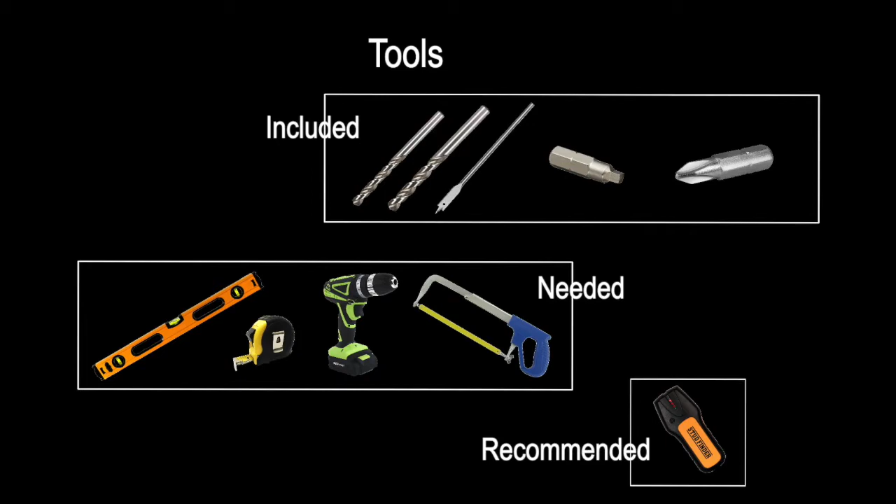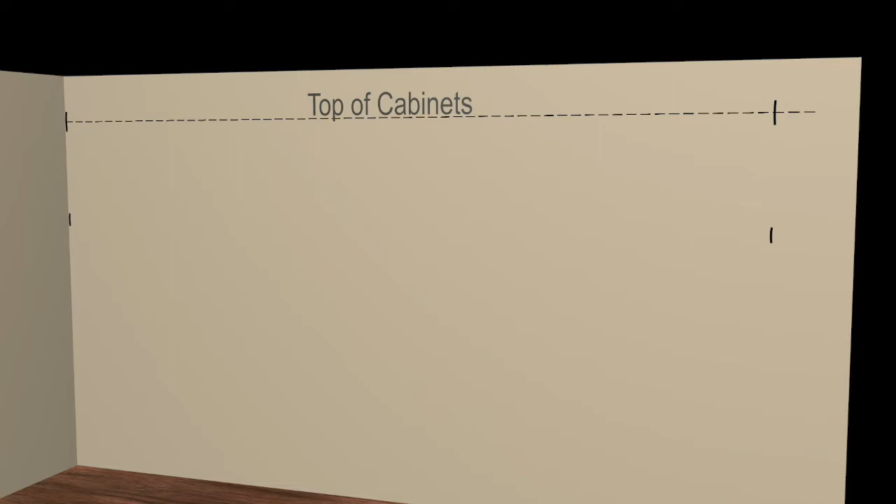On the walls where the cabinets are to be installed, mark the cabinet layout endpoints with short vertical lines at eye level. Using a level, extend each layout endpoint line up the wall and mark a short vertical line that extends both a couple of inches above and below the height where you want the top of your cabinets to be located.

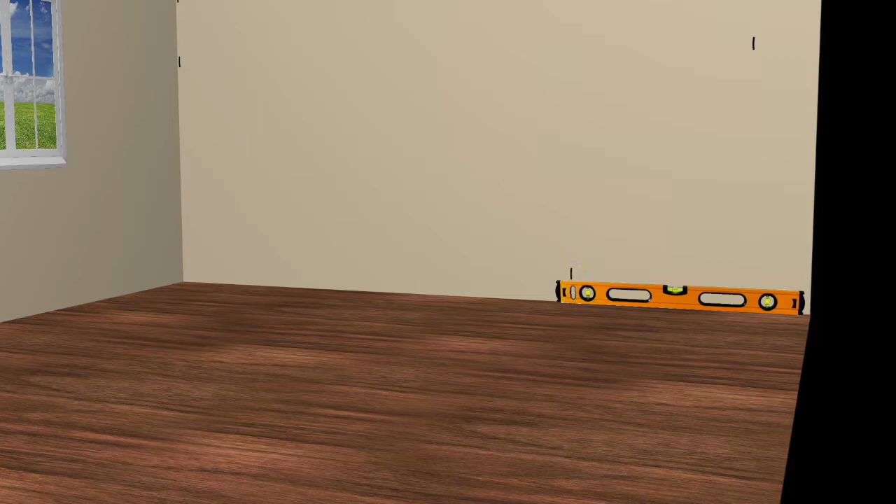Within the cabinet layout space, find the high spot in the floor along the wall and mark the wall at this location. Then check the floor along a line located 2 feet out from the wall. If the high spot location changes, then use your level to transfer the new high spot over to the wall and mark the wall at the new location.

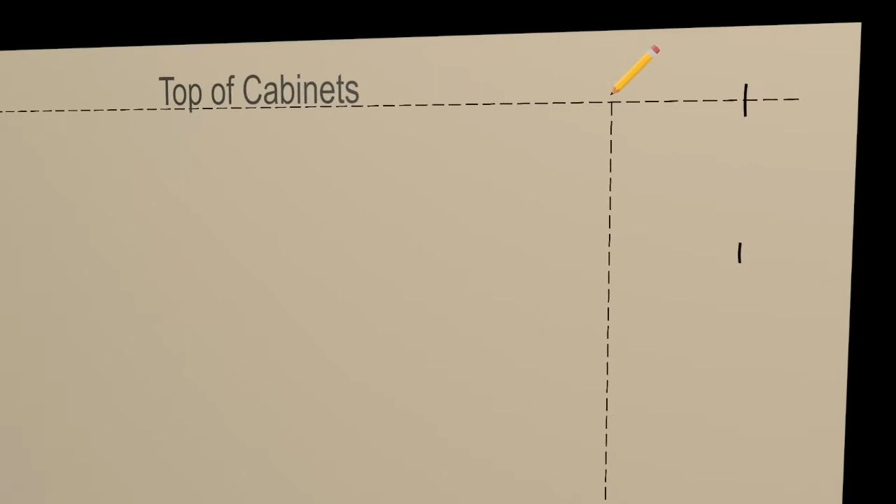At the marked high spot just located, measure up the wall and make a short horizontal mark 13/16 of an inch above the height where you want the top of your cabinets to be located. This horizontal line marks the Eazy Hang wall rail mounting hole height.

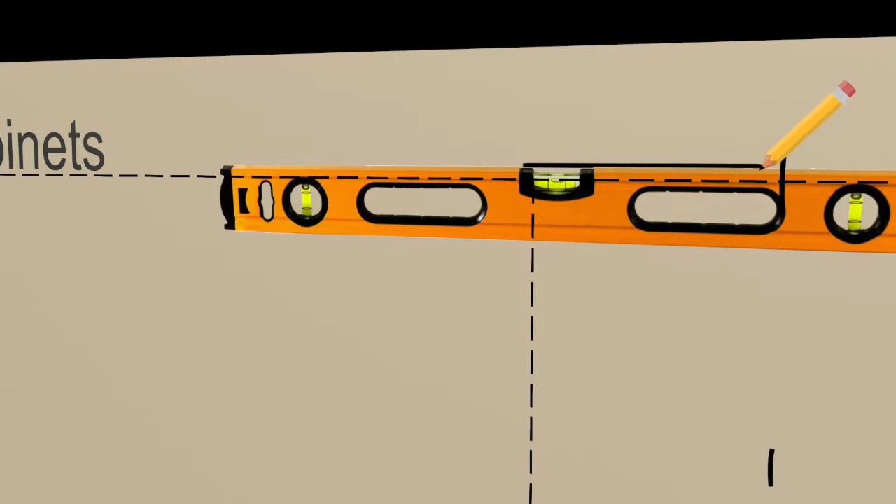Using your level, extend this line over to where it intersects the closest one of the 2 cabinet layout endpoints. Along the horizontal line just made, locate the wall stud closest to the same cabinet layout endpoint and mark this stud center line.

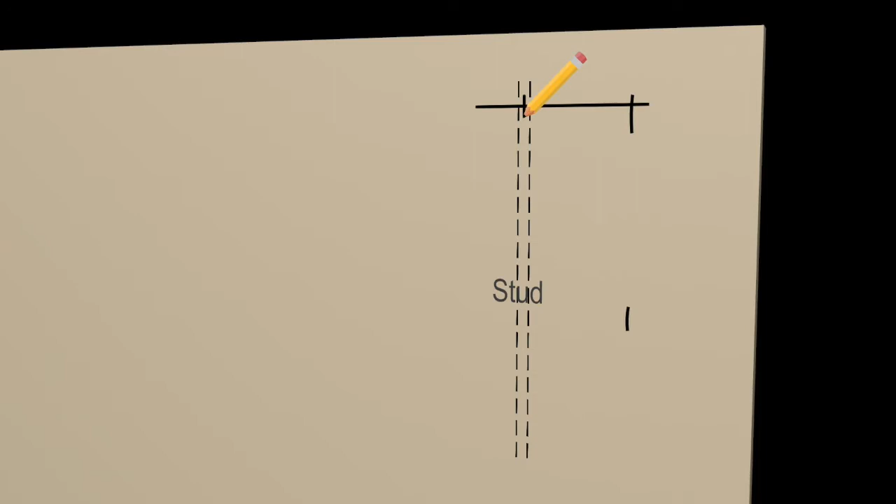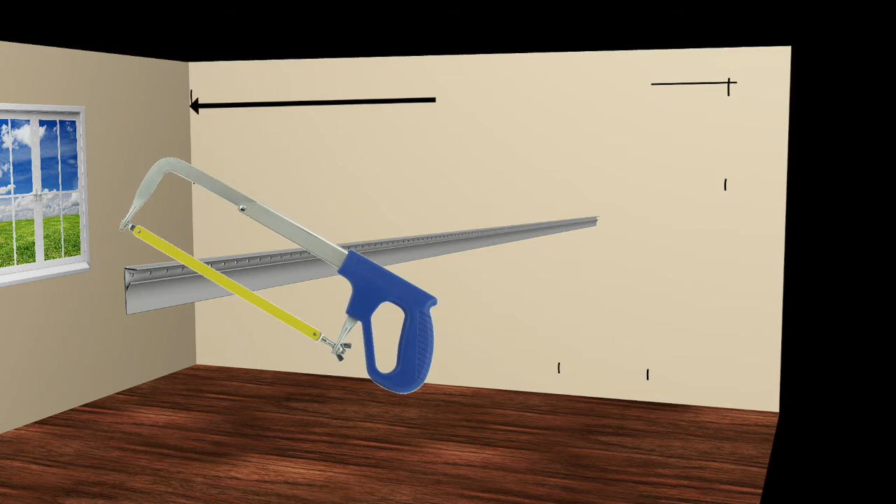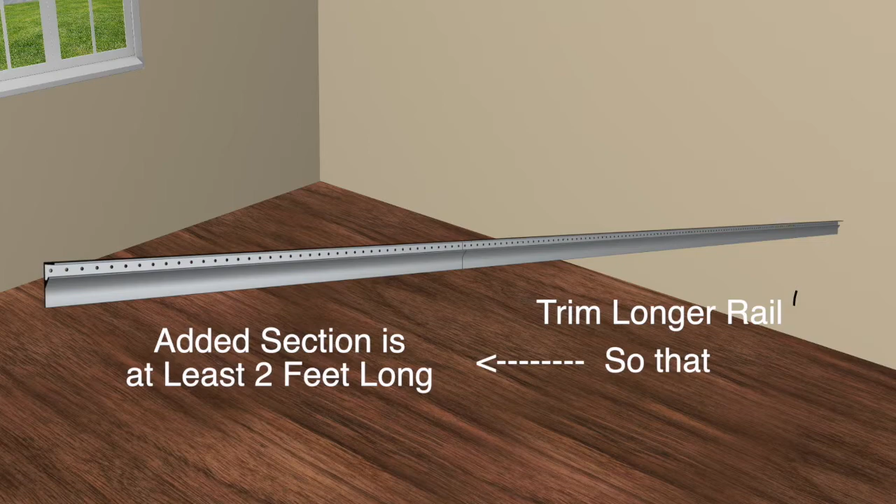Measure and cut the Eazy Hang wall rail 2 inches shorter than the cabinet layout length. If you need to install an additional extension of rail that is less than 2 feet long to make up the total length of rail needed, it is recommended to trim the longer rail so that the added section is at least 2 feet long.

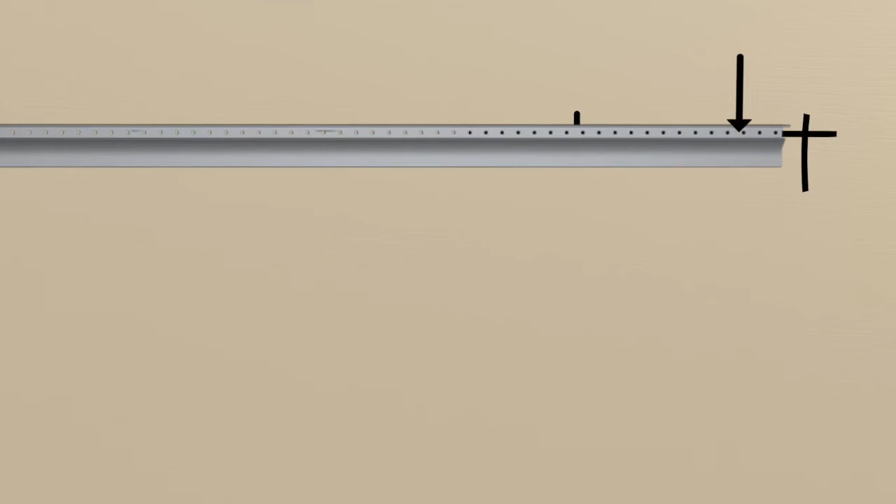Set the Eazy Hang rail on the wall within the cabinet layout space so that the rail mounting holes are centered over the mounting hole line. It would be helpful to install a nail or screw near the center of the layout space to serve as a temporary rail support.

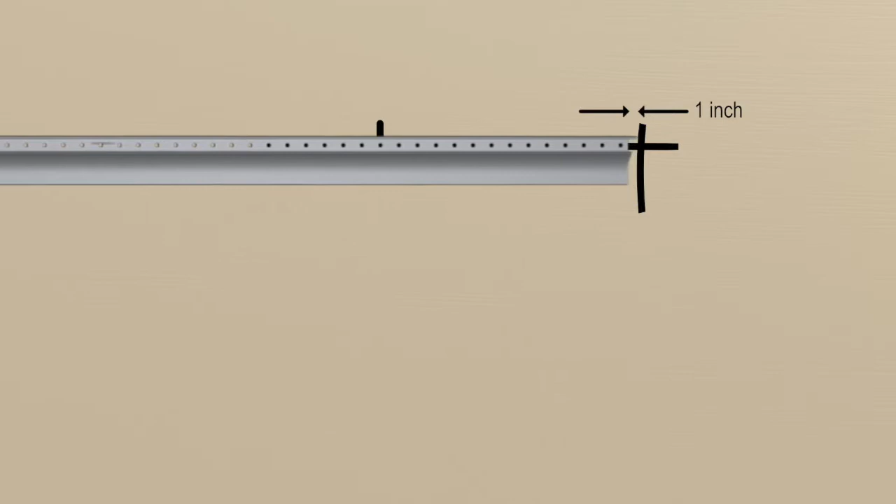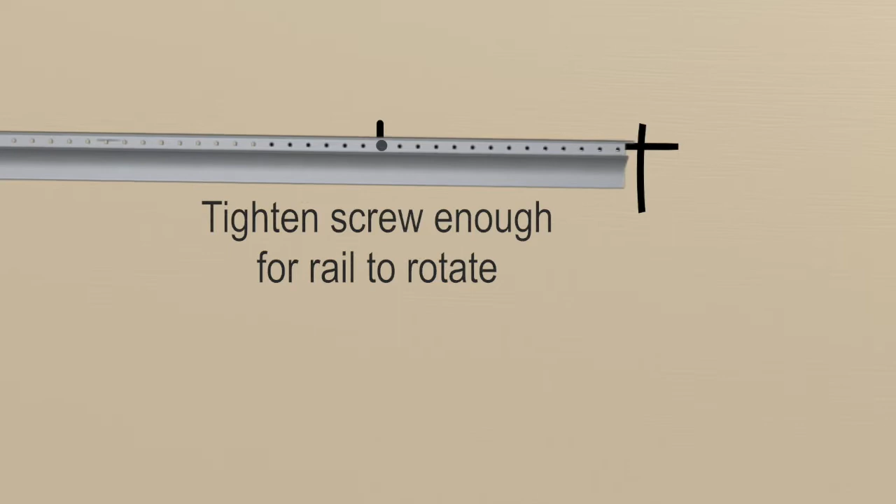Adjust the rail so that the end that you are holding is located about 1 inch from the layout endpoint. Then install a black oxide 10 by 2 inch washer head screw through the wall rail hole into the wall stud whose center line was just located. Tighten the screw so that the rail is snug but is able to pivot freely. Remove the nail or screw installed as a temporary support from the center of the layout space.

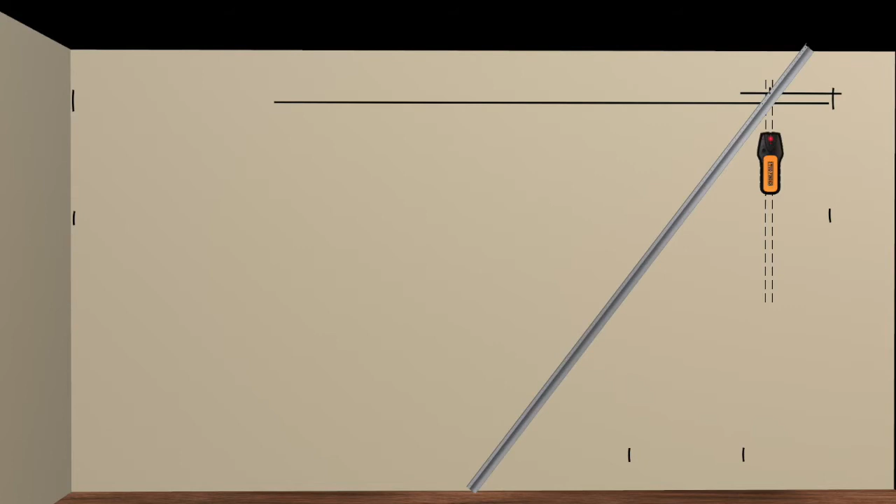Place a level along the top of the wall rail and adjust the rail until it is level. Draw a line along the bottom edge of the rail and then let the wall rail pivot downward to a resting point while locating the centers of the rest of the wall studs along this line.

With the stud centers located, realign the wall rail bottom edge to the level horizontal line just made and install another black oxide 10 by 2 inch washer head screw in a stud near the center of the rail and another screw in a stud near the end not yet attached, again making the screws snug but not tight.

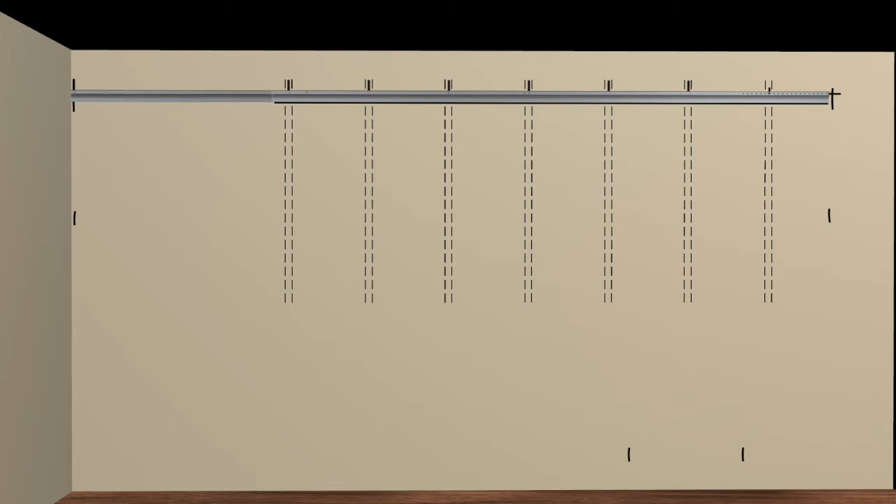If the layout includes an extension, butt the additional rail against the end of the rail already installed. Holding a level along the top of the installed rail and the additional rail, draw a line along the bottom of the extension and find the location of the studs along this line as you did for the main rail.

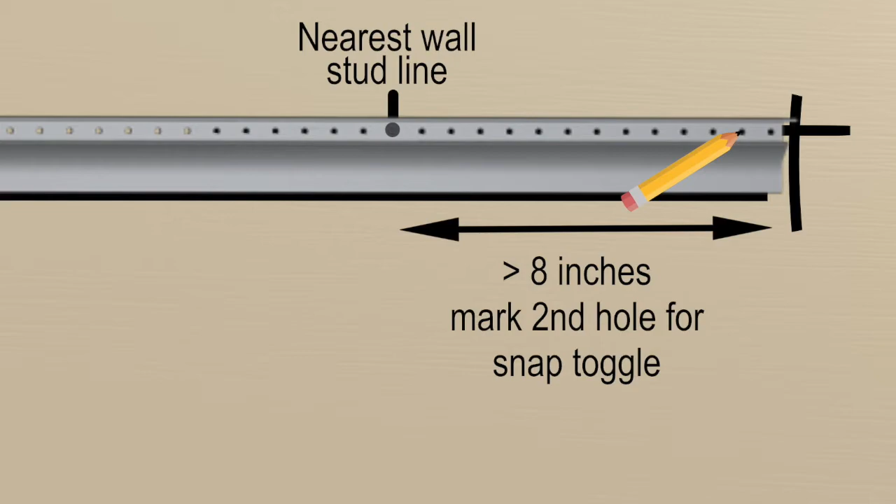Before installing the rest of the 10 by 2 inch washer head screws, check the distance from the wall rail ends to the closest wall stud at each end. If the end of the wall rail extends more than 8 inches beyond the closest wall stud line, then mark the wall by tracing around the inside of the second to last hole of the wall rail at the affected end of each wall rail section.

Remove all of the rail fasteners except for the first one, and again let the wall rail pivot to a resting point while you install a snap toggle at the marked locations. Snap toggle installation instructions are provided separately.

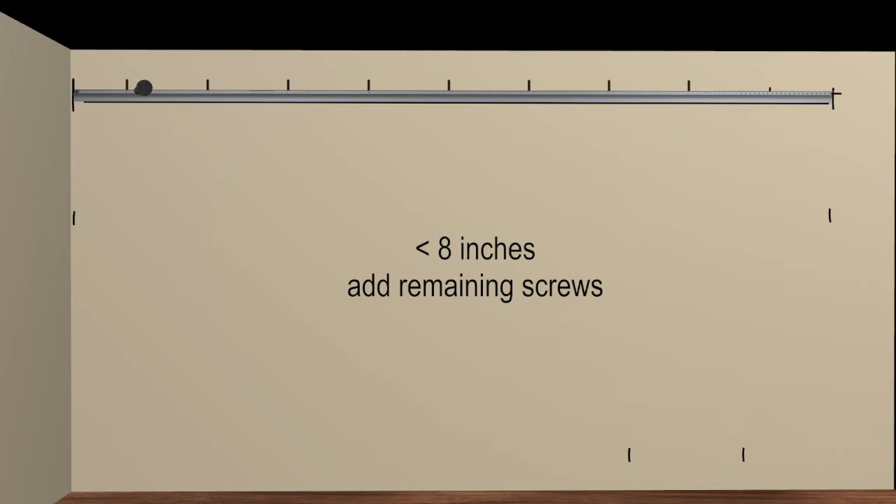If the end of a wall rail extends 8 inches or less beyond the closest wall stud, then finish attaching the wall rail and extension using the black oxide 10 by 2 inch washer head screws at each stud location, making the screws only snug for now.

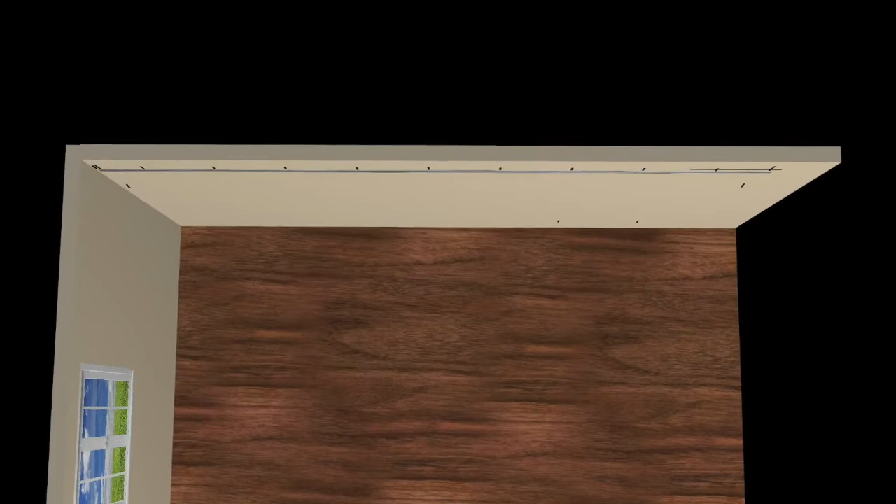Before fully tightening the wall rail at each stud location, the Eazy Hang wall rail needs to be checked for straightness along its length. A great advantage of using the Eazy Hang system is its ability to compensate for waviness in a wall by providing a straight and level hanging surface. This is especially critical when hanging frameless cabinets. Taking extra care in this step will further simplify the alignment of any type of cabinet.

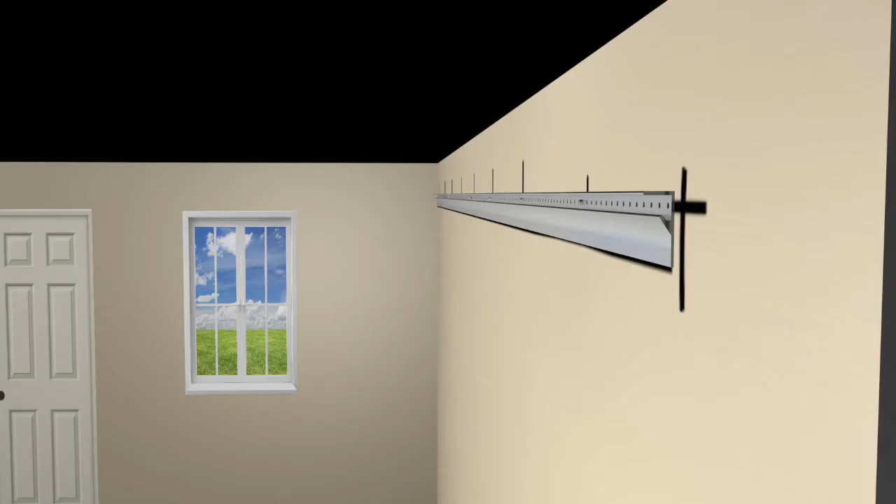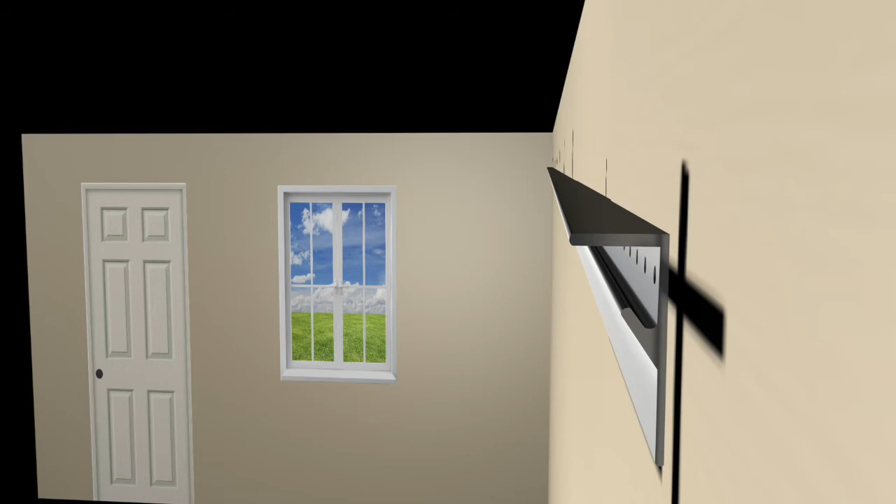Adjusting for low spots in the wall surface. Sight along the top of the wall rail from end to end, noting where there are low spots in the attachment points along the rail. Loosen the rail attachment screws in these low areas and insert the provided plastic horseshoe-style shims between the rail and the wall at the stud locations as needed to align the top of the rail in a straight manner. After shims have been added, the rail mounting screws should be tightened securely. Recheck the wall rail for straightness and levelness.

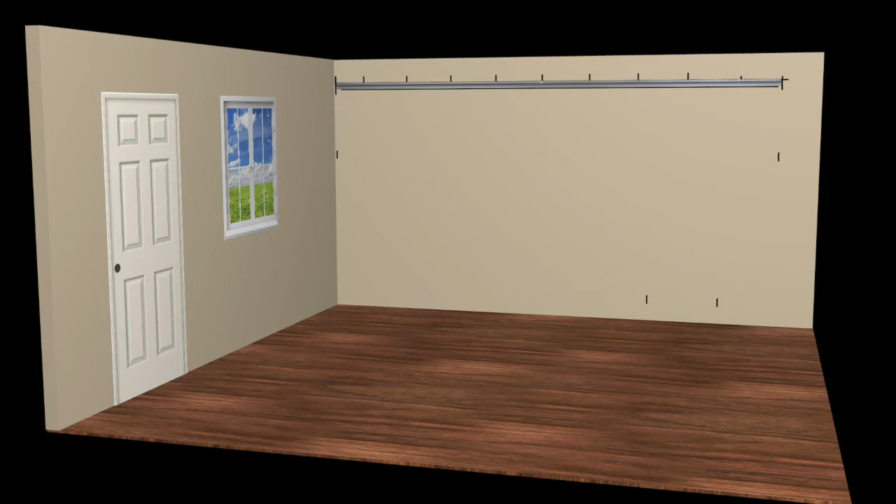Adjusting for high spots in the wall. This is not done now, but rather is accomplished when mounting the cabinet brackets. You simply note where on the wall that the high spot is located in the cabinet arrangement, identify the affected cabinet, and then adjust the location of the affected bracket as needed away from the high spot.

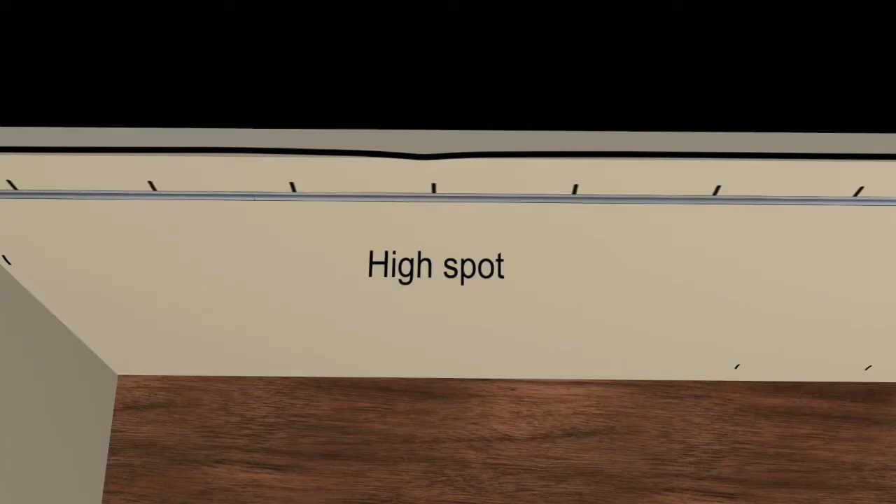If there is an extreme high spot, it may be necessary to modify the wall at the high spot or separate the wall rail into two sections that stop short of the high spot to enable the wall rail to run straight.

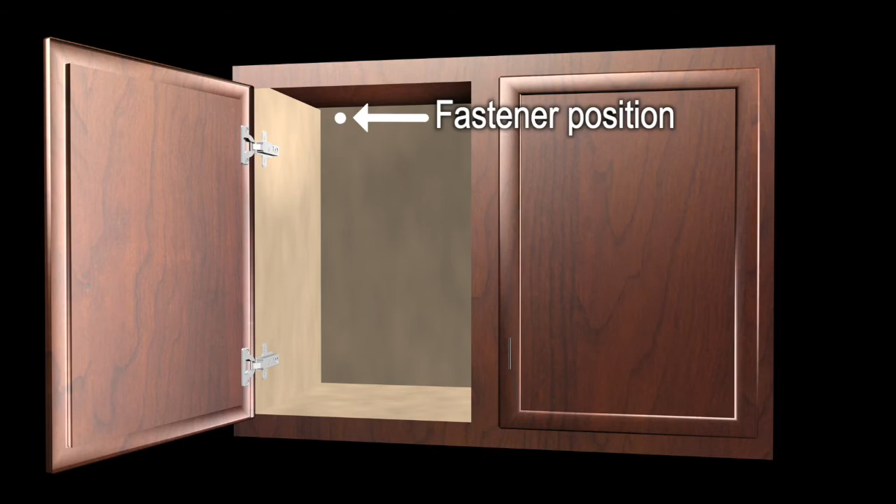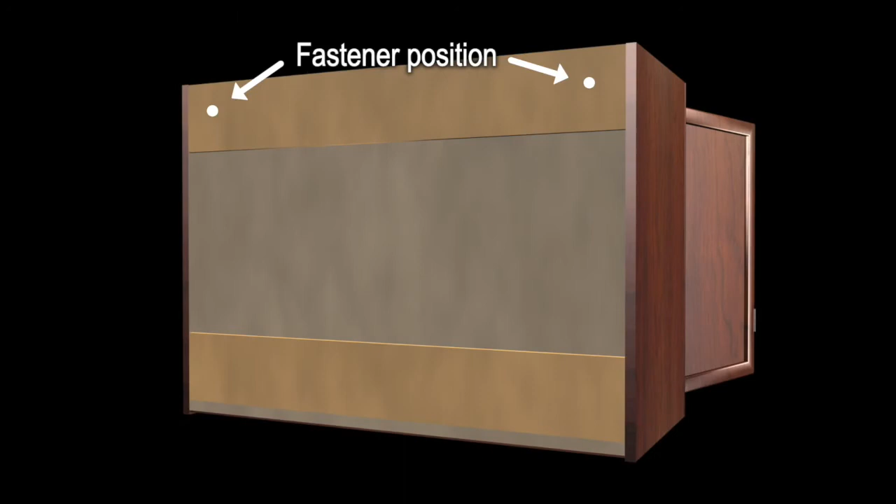Most cabinet manufacturers recommend that their cabinets be fastened through at a point away from the inside vertical corners just below the top interior surface of a cabinet, and similarly at a point just above the bottom interior surface of a cabinet, which typically corresponds with the center of the factory-installed hanging reinforcement strips. These locations allow for a large surface area of strength at the top and bottom of a cabinet for holding purposes, and reduce the chance of compromising the structural integrity of the cabinet.

By design, the Eazy Hang cabinet bracket slot limits fastener placement to accommodate this factory hanging strip. Take one of the cabinets that is part of a given wall layout, open the door, and position a cabinet bracket on the front of the cabinet with the alignment leg resting on top as shown. Set a T-nut against the cabinet interior top finished surface alongside the bracket. Note the location closest to the top of the cabinet bracket that allows for installation of the T-nut and mark the bracket at this point.

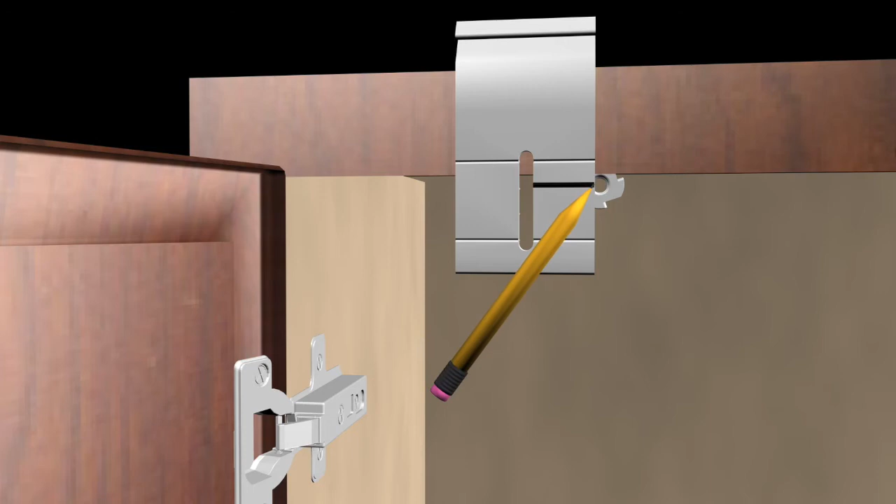Now take the bracket that you just marked and position it horizontally on the rear of a wall cabinet with the alignment leg resting on the side of the cabinet. Set the bracket about an inch down from the top of the cabinet and use the far edge of the bracket as a guide to draw a vertical line on the back of the cabinet. Repeat at the other end of the cabinet.

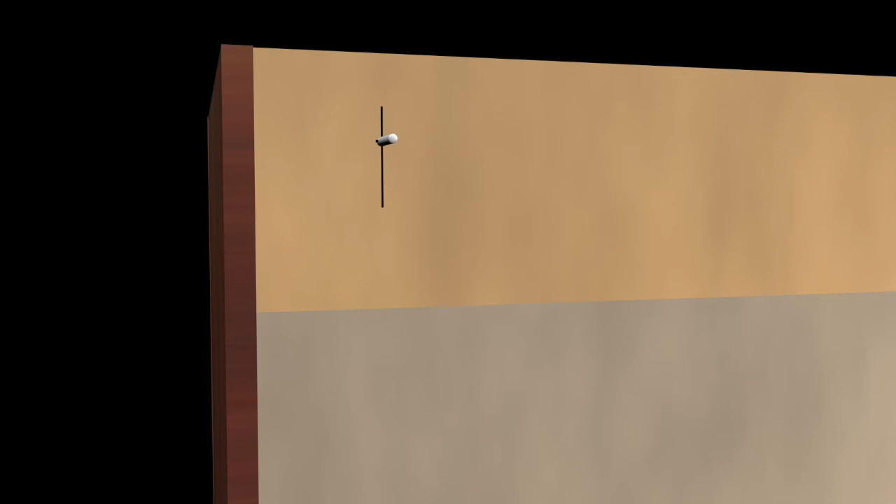Open the cabinet door and press a T-nut into each of the drilled holes from the inside of the cabinet. Set a mounting bracket on top of the back of the cabinet with the alignment leg flush against the cabinet top. Insert the provided 1/4 inch by 20 machine screw through the cabinet bracket and through the hole in the back of the cabinet until it engages the T-nut. With the cabinet mounting bracket alignment leg resting flat against the cabinet top, tighten the screw so that the T-nut barbs engage the face of the cabinet interior rear surface. Repeat for the other cabinets.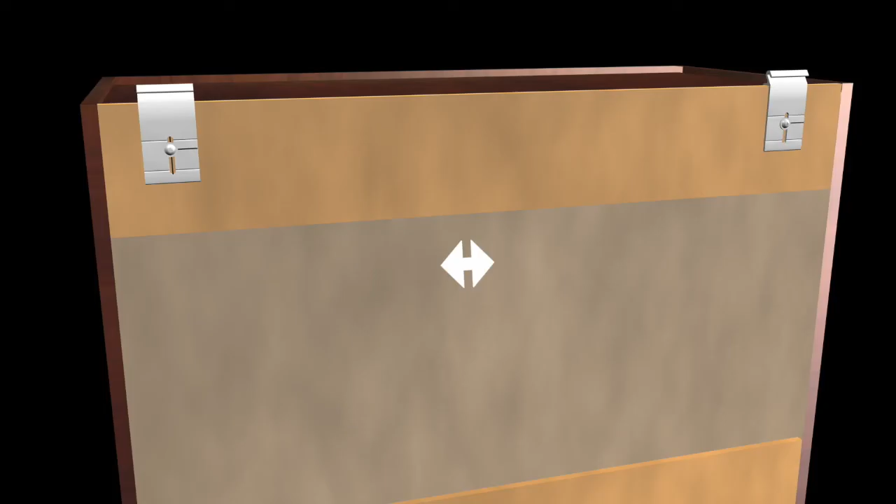If you plan to use the decorative plastic T-nut covers, you can install them at this point. On cabinets over 30 inches wide, it is recommended to install additional equally spaced brackets so that there is no more than 24 inches between brackets on an individual cabinet.

If you are also installing base cabinets, it would be advantageous to extend your wall stud locations down the wall and mark your wall around the 36-inch height off the floor. Set a cabinet next to the wall near its predetermined location. If you have a corner cabinet that attaches to adjacent walls, it should be installed first.

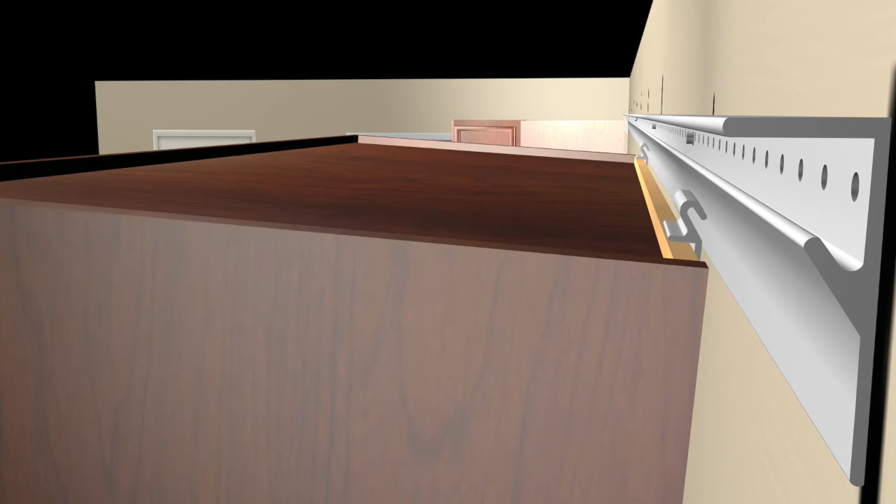Raise the cabinet to about chest height, and then lean it against the wall, allowing the brackets to contact the wall. With the bottom of the cabinet held slightly away from the wall, slide the cabinet up the wall. The cabinet will move slightly away from the wall, then will quickly move toward the wall, at which point you can stop the upward motion, allowing the brackets to engage the wall rail. Make sure that the cabinet brackets have engaged the wall rail before releasing the cabinet.

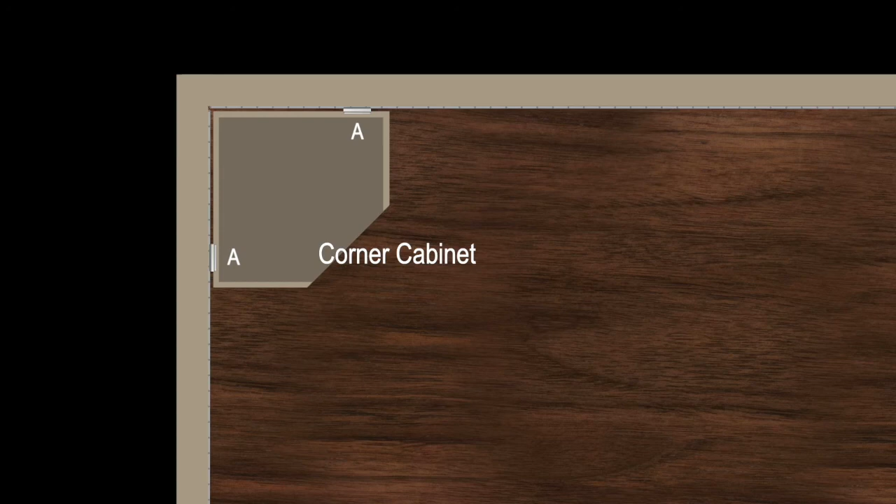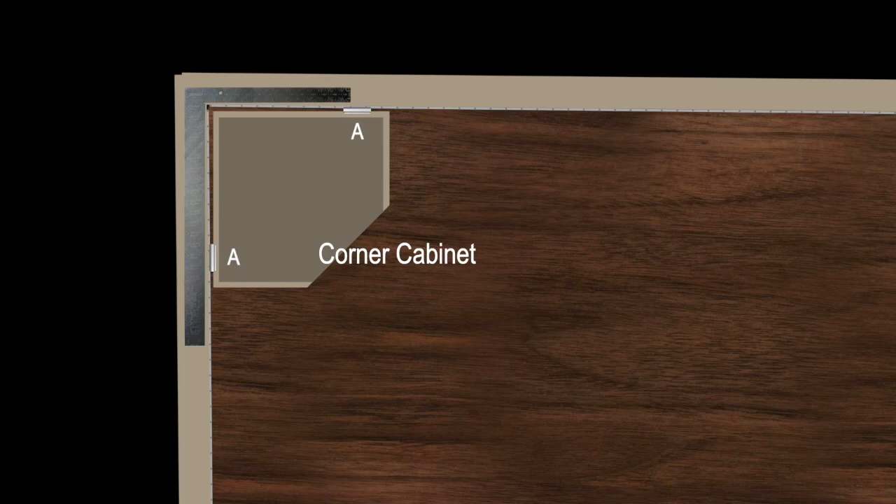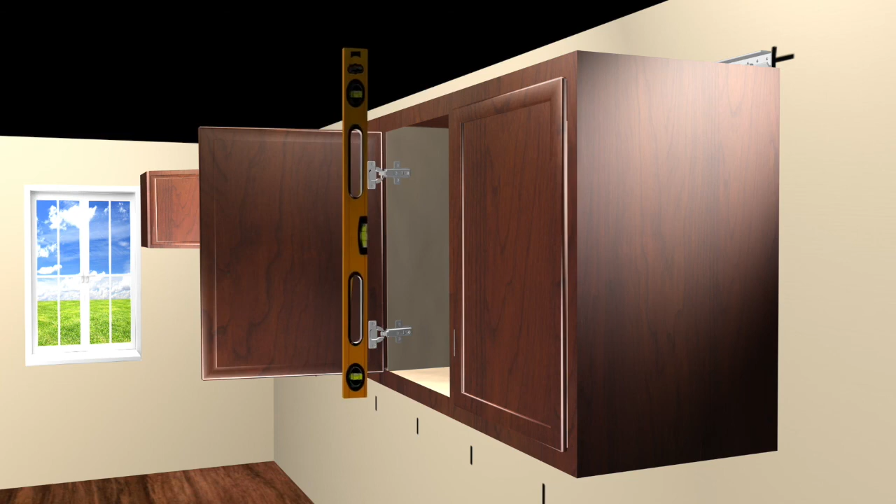Once all of the cabinets are in place, they can be secured to one another either through the wooden face stiles or just behind them through the cabinet sidewalls in accordance with the cabinet manufacturer's recommendation regarding adjacent cabinet attachment. Make sure that the stud location centers are again utilized for this bottom fastener attachment. Place a level on the front vertical face of the cabinets to determine how much the cabinets need to be shimmed away from the wall at the bottom to set the cabinet fronts plumb.

Drill 3/16-inch holes through the cabinet just above the bottom interior surface of the cabinet in alignment with the wall studs. Again, using the provided horseshoe-style shims for spacing, install 10 by 2.5-inch washer head screws through the cabinet's lower sections. Add your scribe and crown moldings as desired to complete the project.